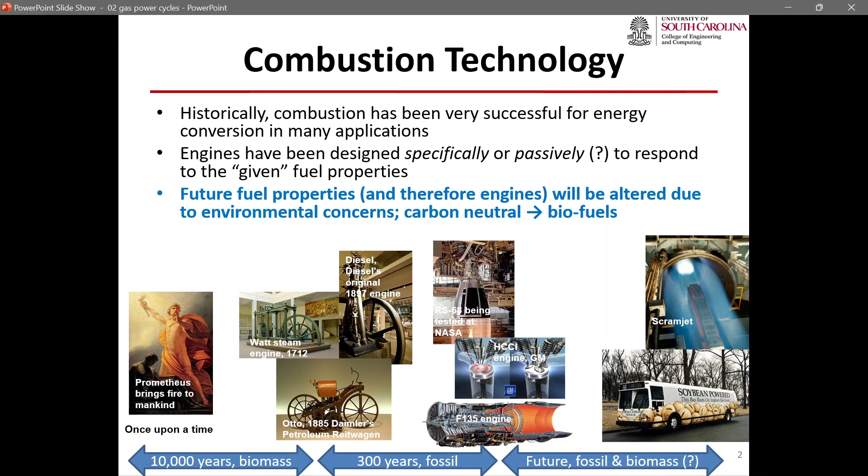I mean, it's a concept that you've seen. I'm pretty sure you're familiar with internal combustion engines, maybe even more than a lot of the faculty here, not just me, especially if you follow Formula 1 competitions - I guess you have to be familiar.

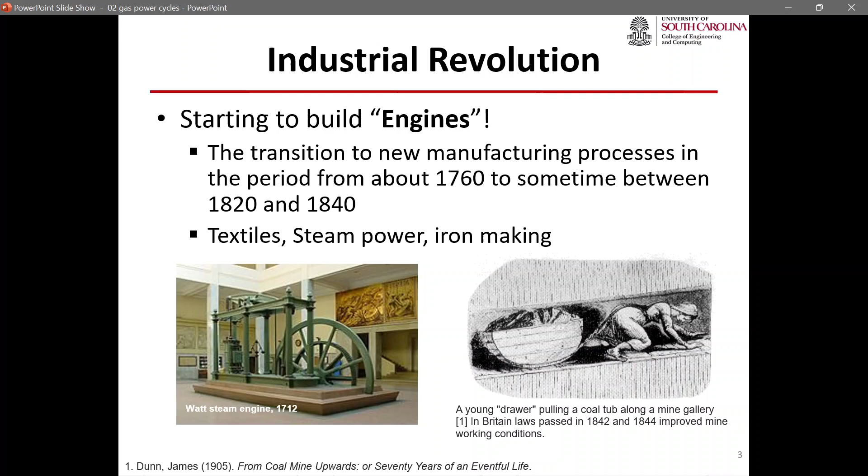As I said, the Industrial Revolution was the time when we started to transition manufacturing processes - transitioning from doing the dirty work by hand to doing all the dirty work and all the movements by machines. So, 3 main cycles. Any questions so far? Just a little bit of history.

We have 3 main cycles when it comes to internal combustion engines in general, the combustion units or gas cycles: the Otto cycle, which is mostly related to spark ignition engines; the diesel cycles, which are compression ignition engines. Both of these have ignition happening inside them, but the compression in the diesel cycles is a little more intense, if you will. And then we have the Brayton cycle, which is going to be the topic of discussion for like 75% of this class - an example of that is the gas turbine cycles. There are other examples that we are not going to cover. For this class, we are mainly going to focus on these three.

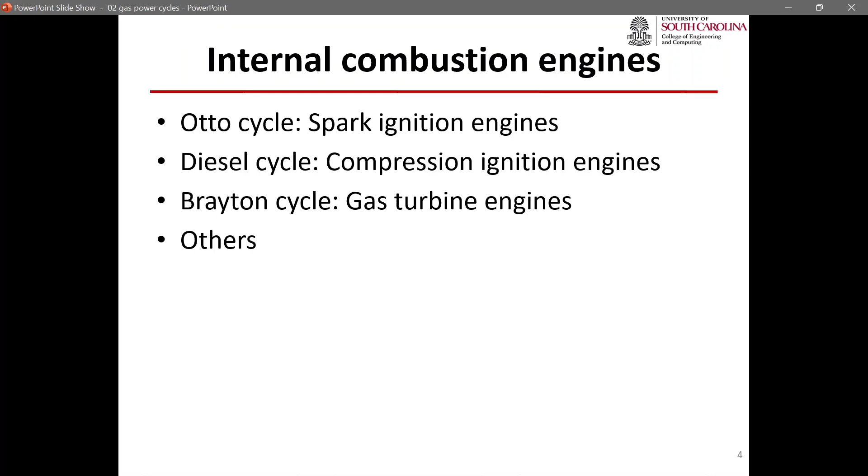Okay, how does a spark ignition engine work? First of all, you can see a GIF or GIF on this process, depending on how you pronounce this word. You can see an animation of the spark ignition process here in the picture. You have a piston moving, and you also have the inlet and exhaust. I'm assuming this is a familiar concept to you; you have seen this before.

The idea here in the spark ignition engine is that we are going to feed the fuel and air simultaneously into the cylinder. Then, when compressed enough, we have ignition, which causes a release of energy that pushes the piston downward. Then you release the exhaust gas, and so on. So this is the principle, the most basic Otto cycle.

There are different parts to it: the intake of fuel or air, which is called the induction; the compression of fuel or air; then ignition; and also the exhaust out.

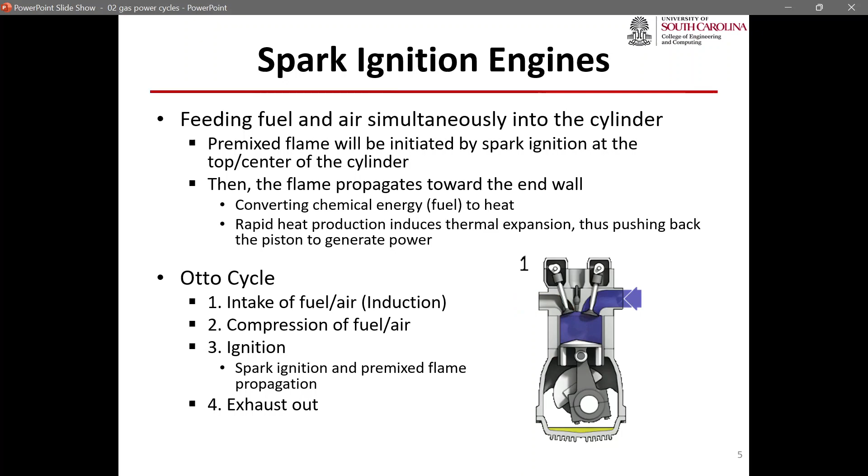In compression ignition engines, or diesel cycles, you only feed air into the cylinder. That's the main difference. The fuel and air are not fed to the cylinder together — air is fed to the cylinder by itself, then you have the compression, and then you inject the fuel into the compressed air. That's the biggest difference between these two. Everything else is going to be exactly the same. You have the intake of the air as in diesel.

In the diesel cycle, we have the compression of air, and then the ignition, which is a process that includes fuel injection, rapid mixing, and auto-ignition, and we also have the exhaust out.

Any question about this cycle?

Is it based on the way the fuel is ignited? Like, the diesel engine produces more torque than the gas engine — is that based on the way it ignites, or is it something to do with the diesel itself?

That's a very good question. That's what I wanted to discuss with you guys, and I wanted to ask your opinion on this. What do you think will cause more torque in the diesel engine?

The Otto cycle engines — I don't want to call them regular internal combustion, I want to call them Otto cycle engines — which are mostly installed on cars, are going to be a little faster. But diesel engine vehicles, like trucks and big trailers, are more powerful, so they can haul more weight. But they are not going to be as fast. The acceleration is different — that's the common knowledge.

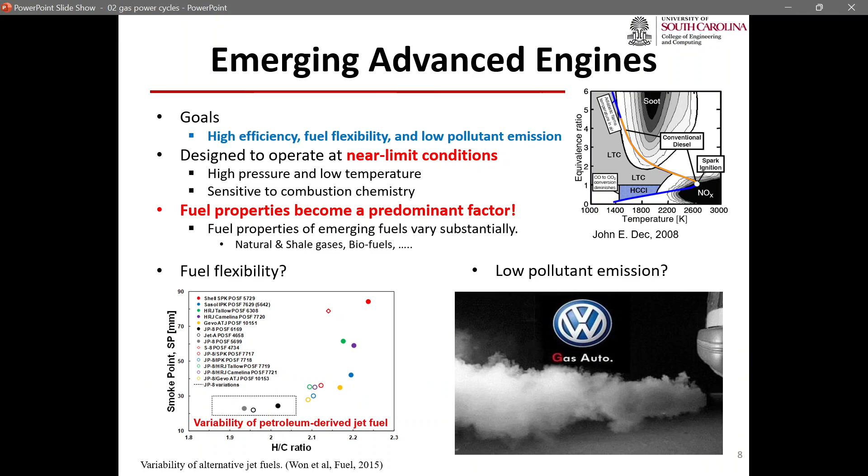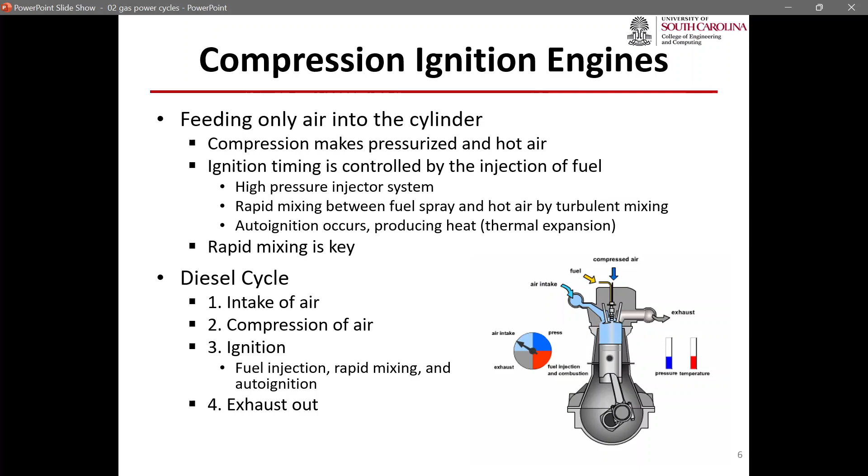Let me ask you this. That's actually a very good segue to this. Why do these three cycles, the first two diesel and Otto cycle, look different

compared to the Brayton cycle, the gas turbines? What is the most important difference? Yes, because in this one you're using the exhaust, really using the exhaust, while in automotive engines you're using the drive shaft, so you're not heavily using the exhaust.

We are not using the exhaust here as well. It's that we are going to use the exhaust velocity in the calculations, but that doesn't mean we are using the exhaust directly. Like the thrust is coming directly from the combustion. Okay, you're getting a little warmer there. You guys can jump in, you don't have to.

The direction of it, can you elaborate a little more? Kind of like what you're saying, how with the combustion engine it's transferred to a shaft perpendicular to it, and with the gas turbine it's usually inline.

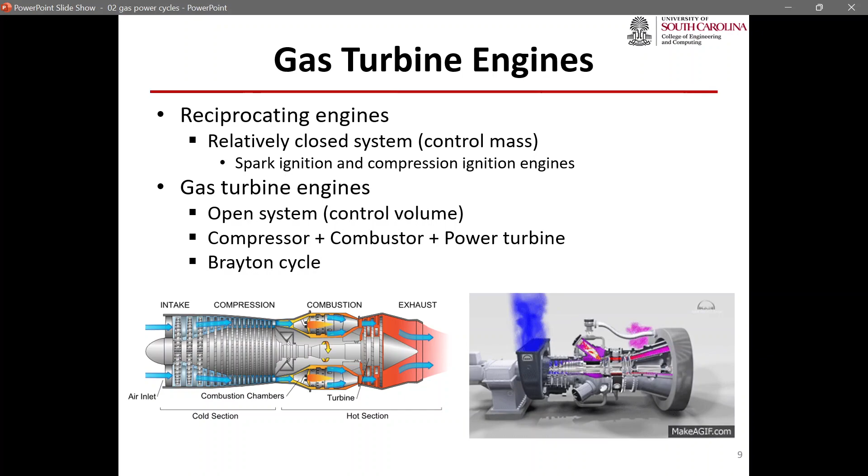So let's move on. What are the different types of gas turbines? We have 4 main types of jet engines that use the Brayton cycle.

The first one is the high bypass turbofan. We'll talk about these more later, but they have two sections. The first is the bypass - when air doesn't go into the engine itself, it just bypasses the engine, hence the name, and goes around it. Then some of the air goes into the engine. The bypass ratio is very important here - how much of the air bypasses the engine and goes to the exhaust directly. These types of jet engines are mostly used at lower speeds.

Then you have the regular turbofans or turbojets, where all of the air goes into the engine, then you have the combustion process and the exhaust thrust generation that we'll talk about. These are also low Mach number aircraft, but they can do supersonic - lower Mach number compared to ramjets.

Ramjets and scramjets are the type of jet engines we'll use in supersonic, or sometimes for scramjets, hypersonic situations.

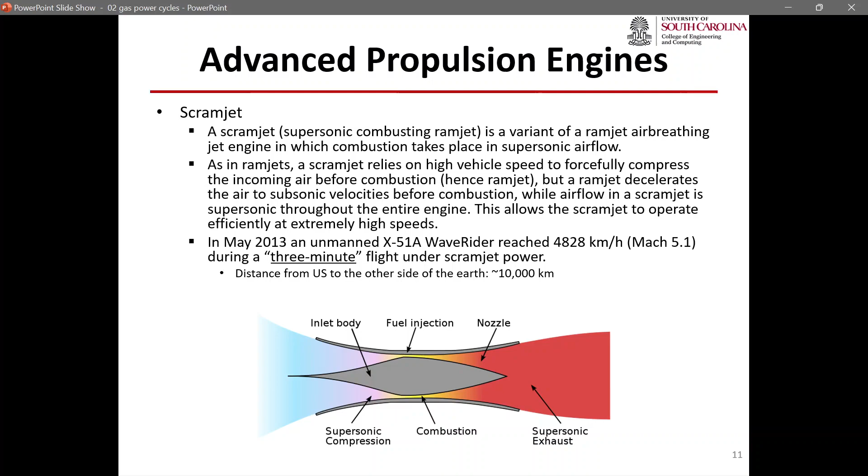No, the laws are going to be different at different altitudes. That's for sure, but it still has an effect on the ground. Even if you're very high in altitude, it's still going to have some sort of effect on the ground. You are going to generate a lot of sound waves, right? But your altitude is going to be different. Let's say you are at an above-atmosphere altitude. How much impact do you think that is going to have on the ground? Very little, right? The gravitational effects are there, so you are going to go around, but you're not really affecting the atmosphere that much.

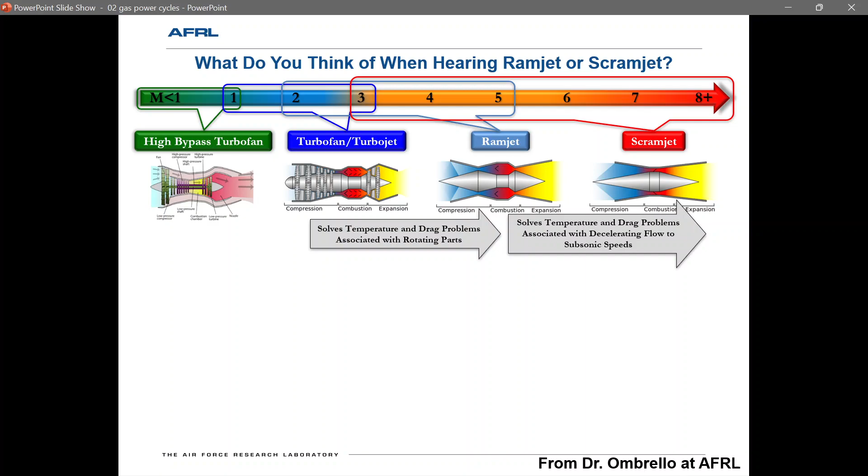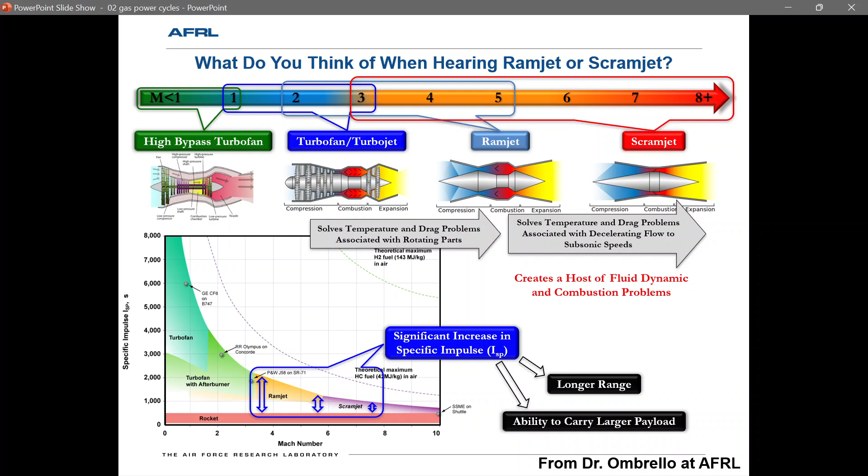Okay, I guess we talked about this. That's the only thing we'll talk about regarding the impulse. Do we know what impulse is? Have you heard about this parameter? But how do we calculate it though? That's all right, natural log - we'll get that, don't worry about it. So, because of the significant increase in specific impulse, Scramjets are going to have a longer range and the ability to carry larger payloads.

And actually, this is the first flight of the X-51, from May 2010.

Okay, let me ask you one question. Would you say this is not higher than Mach 5? Would you say this is hypersonic or supersonic?

Okay, can you see it? I can, more to the left, more left.

Why would you say this is supersonic? Why would you say this is hypersonic?

Actually, stop here. What do you expect to see during hypersonic flow? Think about a shuttle re-entering the atmosphere - what do you see there? Aerodynamic heating, a glow, as you said. Essentially, you have a shock wave, a blunt shock in front of the shuttle. You have ionization, you have plasma present there, and a lot of aerodynamic heating. That's what is going to cause the glow, right?

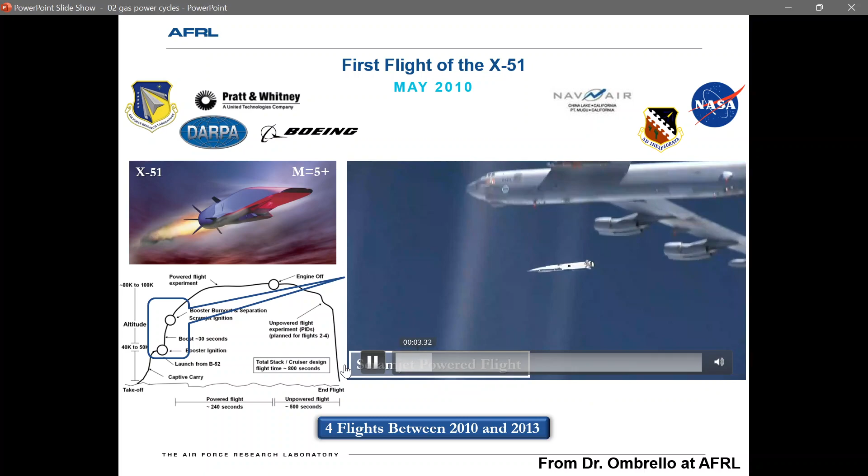On switch is safe. We have a booster burnout.

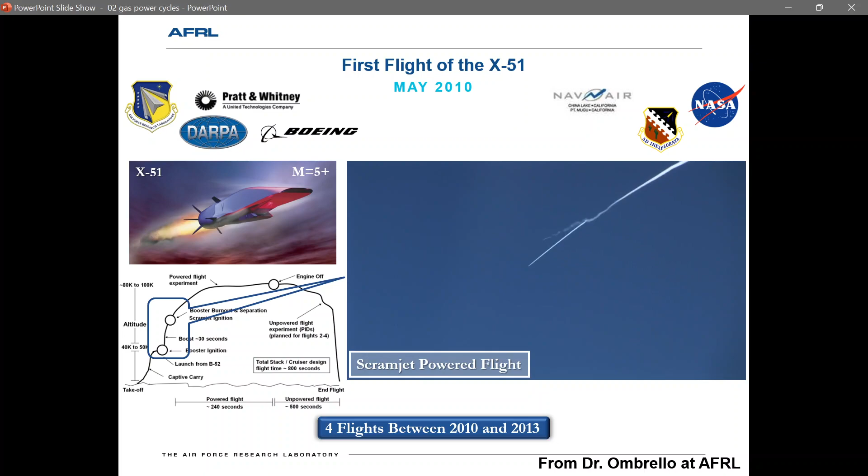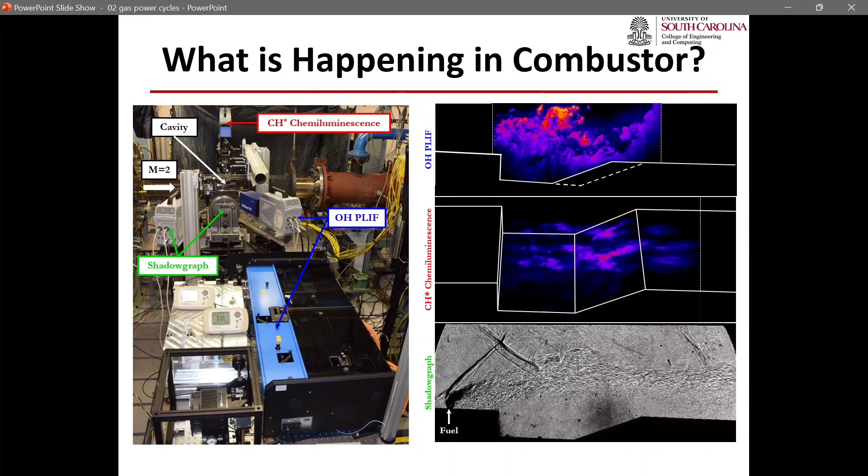So electric vehicles, at least at this point in their life, don't really save the environment. But that's... no, they're pretty cool cars. Have you ever driven a Tesla? They are cool.

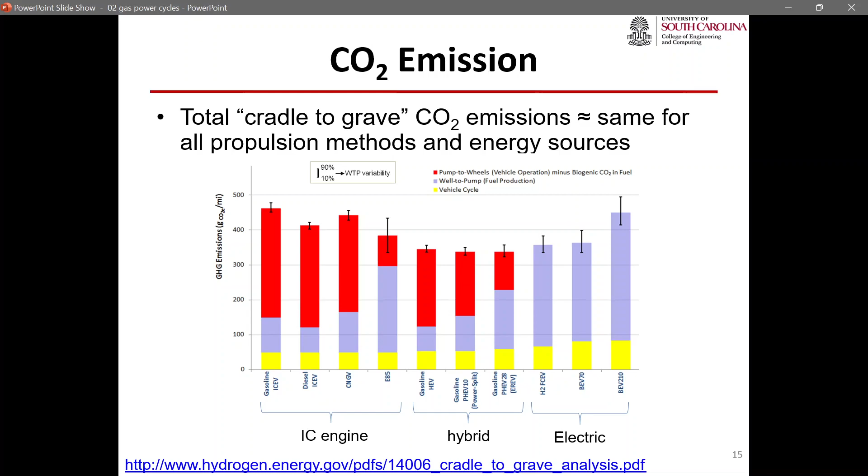They are very smooth, very cool. I actually had an electric vehicle, a BMW i3. It was a very cheap car—you could buy the used one for a very cheap price. But I ended up selling it because of the range. 70 mileage, yeah. But it is a good car though, I loved it. What was it? BMW i3. If you're thinking of buying one, you should definitely buy used. They're not that expensive, believe me—cheaper than a used Toyota Corolla.

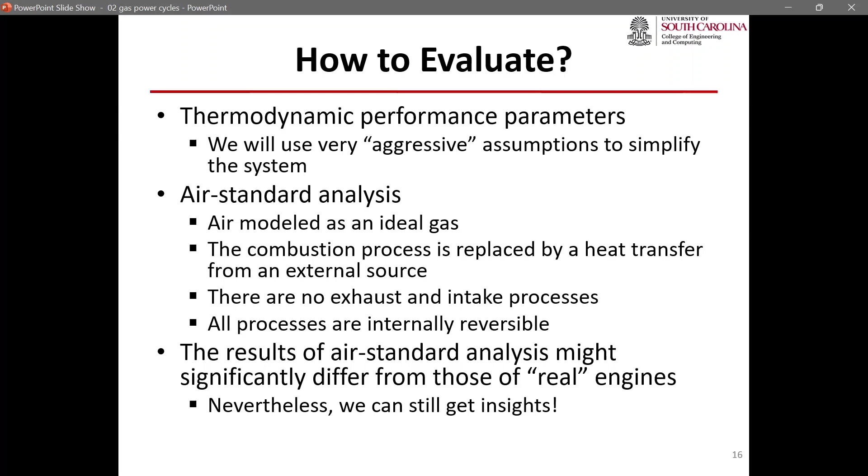I guess there were only two people who really applied for jobs. Two others didn't graduate, and one of them went to get an MBA. One of them is doing her master's. I guess Tyla is also doing graduate work—you probably don't know her. I think she found a job, somewhere down in Florida, I believe. So like two of them. She's still here? I haven't seen her. I only know about Ryan. They didn't really fill out their exit surveys despite my numerous emails—probably the same for the design course.